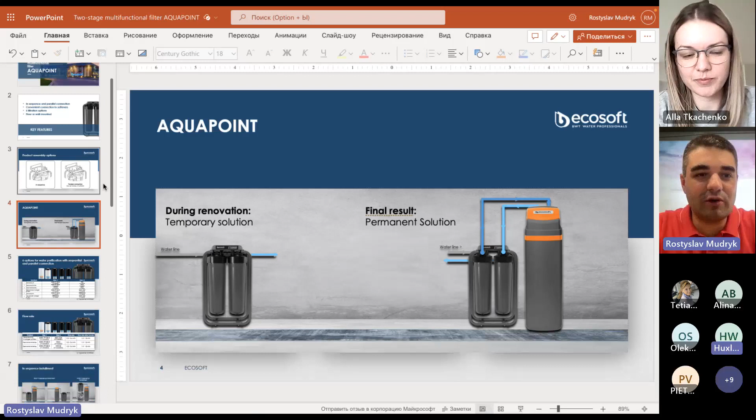As usual, I will share my screen and show a few pictures to start. So today we will talk about the AquaPoint filter. Let me share the screen. So now you should see the screen. The AquaPoint filter is what we call a two-stage multifunctional filter, and by two-stage basically we mean...

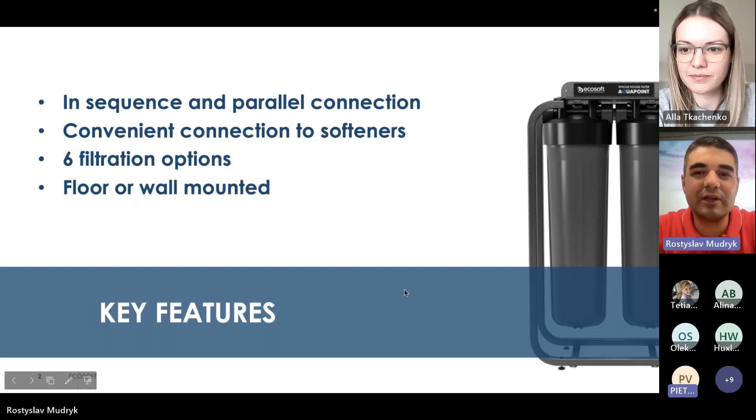By two-stage, I would like to ask... to mute the microphone, it's the same thing as before. Peter, can we ask you to mute the microphone? Otherwise we will talk in French. Yeah, it's muted now.

By two-stage, we mean that it has two big blue housings mounted on a frame, and these big blue housings can be connected in various configurations, which is what we'll explain today. It's also a very convenient solution to be connected to softeners, and it has at least six filtration options, depending on the water quality and the filtration system you're designing. It's designed to be conveniently mounted on the wall or on the floor.

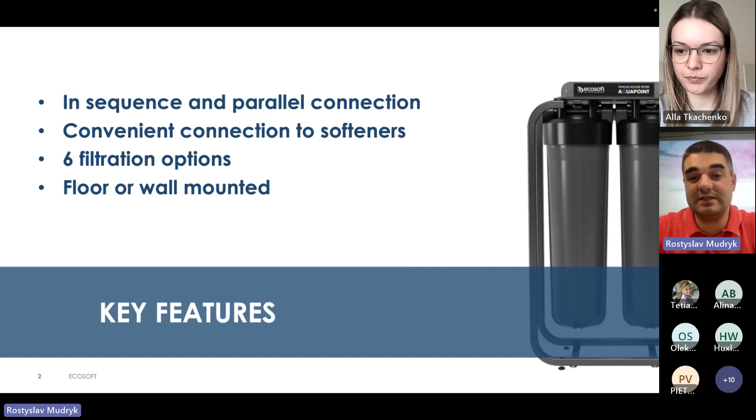This looks like a very simple thing at first look, but if we look at the materials now used to build a house, sometimes it's wood, carton, or plasterboard, where you cannot easily mount a filtration system. So the AquaPoint is designed with the thought of making the life of technicians and engineers easier. That's the general idea.

When I say it has various connection options, I mean the filter is delivered disassembled—I'd say it's Lego style or IKEA style. You open the box, which we will do at the end of our talk, and you connect the housings in the way that's convenient for you. So this is a very flexible product.

We call this way of connection 'in sequence,' when you have one filter just after another, made in sequence. Or you can make a parallel connection, which can be used for different applications too—we'll talk about that later. Today we will use these two terms, in sequence and in parallel, to describe these two ways of connection.

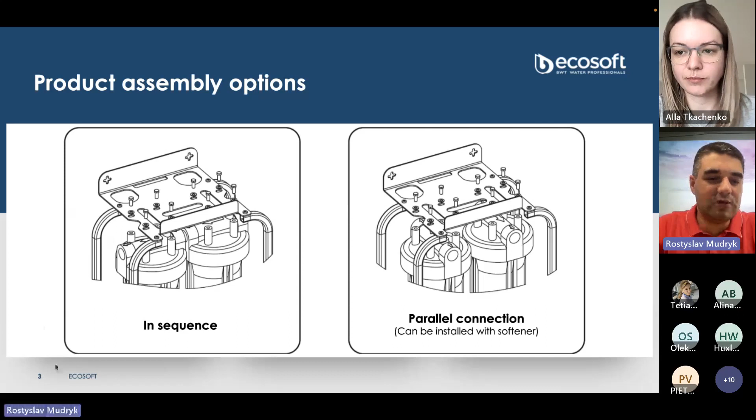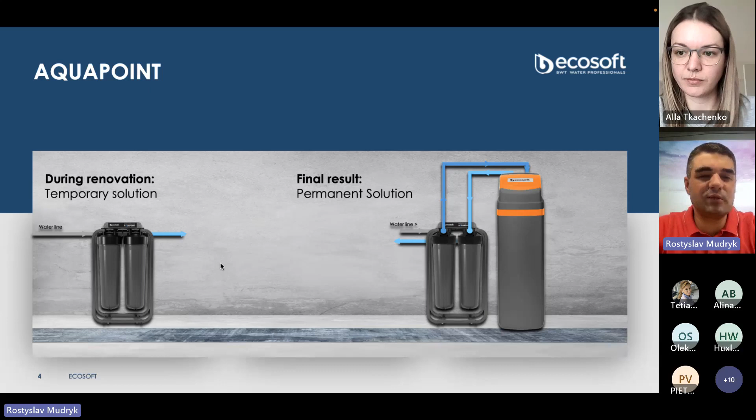And of course, we will talk on the type of connections when it is used separately and when it is used in combination with various products. And at this point, I would like to jump to the questions from Alla, and we will be back to the presentation while we discuss the questions.

I think it would be much more convenient for everyone. Thank you, Rusty, for the prompt introduction. So to start with, I would like to ask you, what was exactly the idea of the AquaPoint product?

I believe everyone knows what the big blue housing filter is for. So normally almost all filtration units, filtration systems, start with the big blue housing as a sediment filter.

And when we looked at modern houses, like in the room we are now, I will show it. For example, in this room we have a wall. This is a modern material, a kind of carton, or it could be called plasterboard, or it can be wood. And when you try to mount a bracket of big blue housings, first of all, it's quite a complicated job.

So first you have to go to a DIY store and get special tools to do it. And when you're done, you say, I finished. But you would have some surprises after 6 months or a year. After several replacements of cartridges, when you switch and try to change the cartridges, and tighten the housing, you discover that the bracket is already outside the wall, so it is detached.

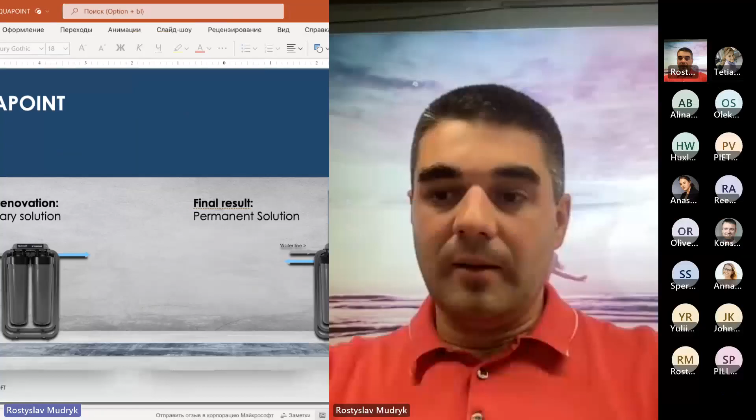So this was basically made for well water, but what we also see now is that many companies use AquaPoint for tap water too. For example, in restaurants or cafes when we install robust units, many companies put AquaPoint just before the robust, and then they do all the filtration in the kitchen or in the bar. So you can go both ways, well water and also tap water.

Okay, clear. So if a customer decides to buy an AquaPoint, like in addition to a robust or softener, does he also need some tests for water analysis for AquaPoint as well? Do I need it, and what kind of test?

Well, basically when we install a filtration system to well water, everyone requires a water test. This is the rule, because you never know what the water quality is in the well. Even if you install a simple filter like AquaPoint, you have to do a water test, because when an end customer contacts us, or which normally does not happen, normally the end customer contacts our dealer and asks for water filtration. So they contact us as water experts, and to provide a solution we have to know what we have to solve. This is important. So the water test shows the dealer, shows us, what are the problems to be solved, what are the contaminants to be removed.

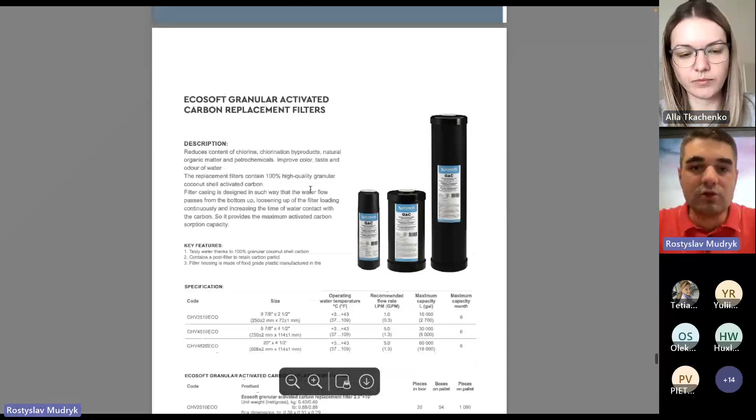Before answering this question, I would like to jump to our catalog, which is available on our website. We are working a lot on our website, so I always try to show it because it has a lot of innovations, something new every week. The catalog is right here on the very first page, so you may download it.

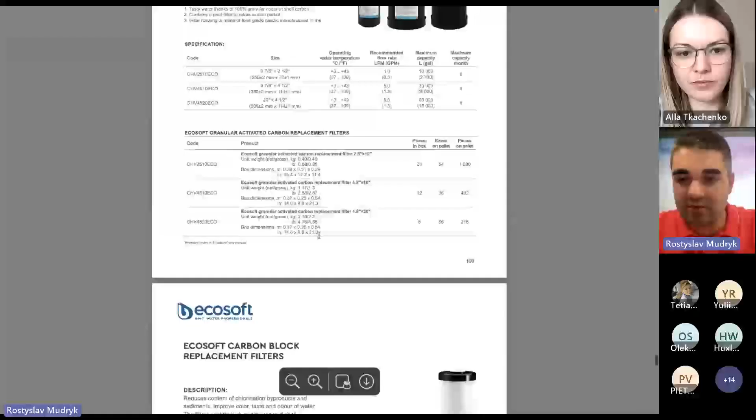When you open it on page 109, with the replacement filters, you would find all the filters I have just shown, right here.

Thank you. And to answer your question, how often to replace: there is the capacity. For example, the big blue GAC has a capacity of 80 cubes of water before removal efficiency drops, this is the capacity on chlorine removal. So we recommend replacing the cartridges based on time, and we suggest changing them at least twice a year.

Because all the cartridges I have shown are not washable, so there is no regeneration. They just consume the contaminants, and it's nice to replace them every 6 months at least to keep them fresh and to keep the water quality high. So this is important.

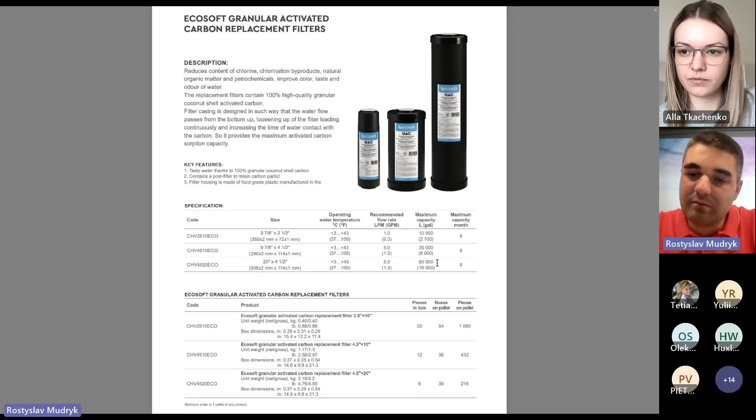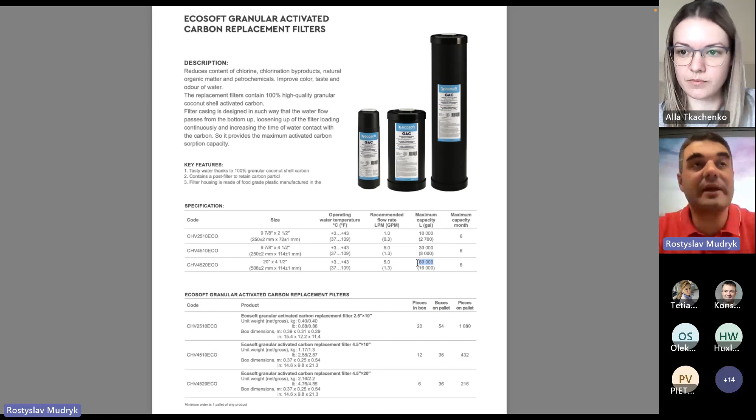Or you replace them by volume. So you have to follow the volume. If it's exceeded, it's better to change it even more often. Sometimes you have to replace them more often. As a general rule, from experience, normally these kinds of cartridges are replaced within the range of 3 to 6 months. So this is a reasonable replacement frequency for these cartridges.

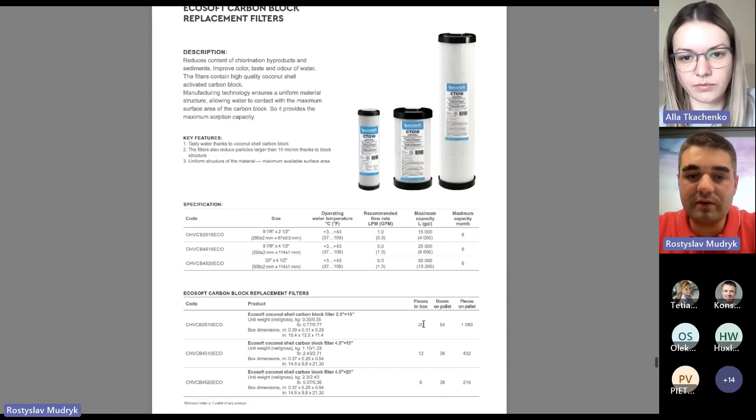So we have the capacity for the GAC, and then we have the capacity for the CTO. We have the values here. These are the small ones - this is not from this presentation. The Ferromix has quite a small capacity because iron is quite a hard contaminant to be removed.

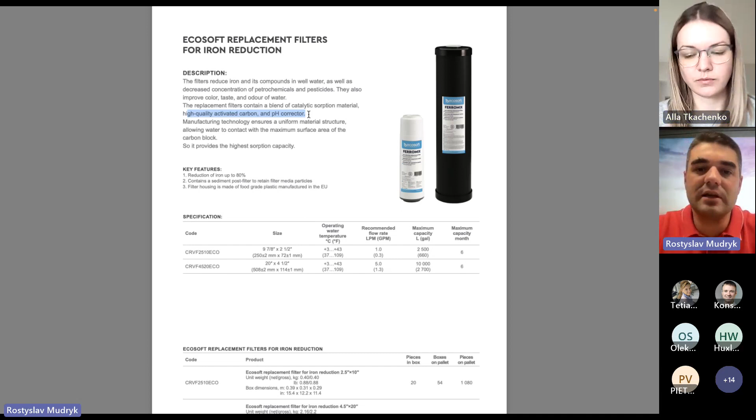But it's also important to mention that inside, this is not just iron removal media. Inside we have a combination of iron removal and pH adjustment to make the iron removal effective. So this is a very nice and, I would say, tested combination of medias, and we have been producing this cartridge for more than 5 years. This is also one of the best sellers in our product range.

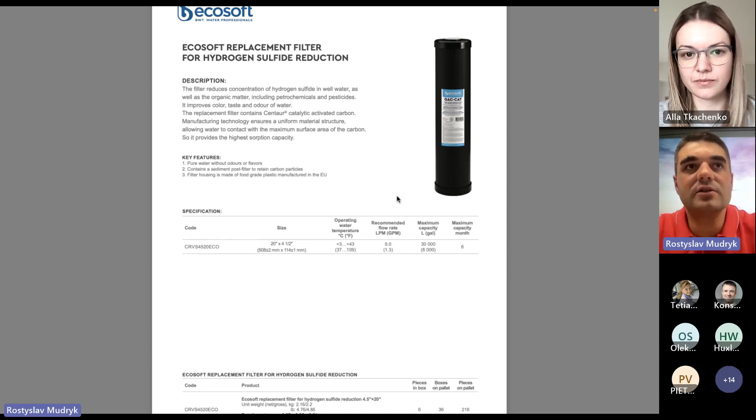But the best seller, the leader, is this one, the GAC CAT, catalytical granular activated carbon, to reduce H2S. So the best application is to sell it with Ecomix softeners just as a final filtration stage.

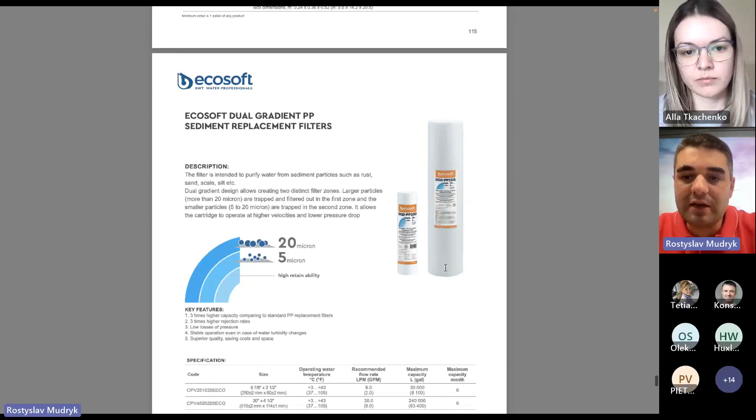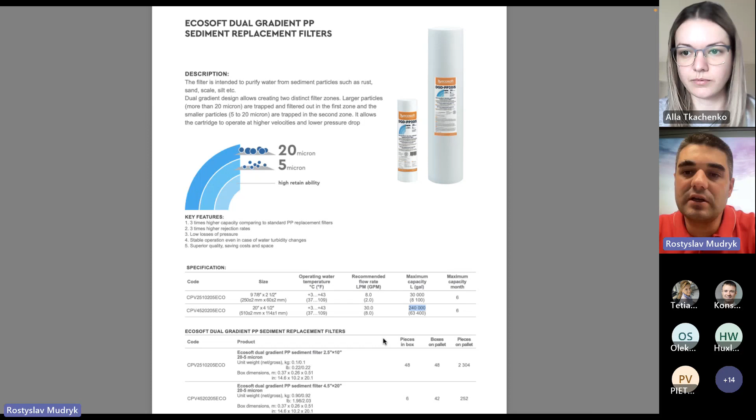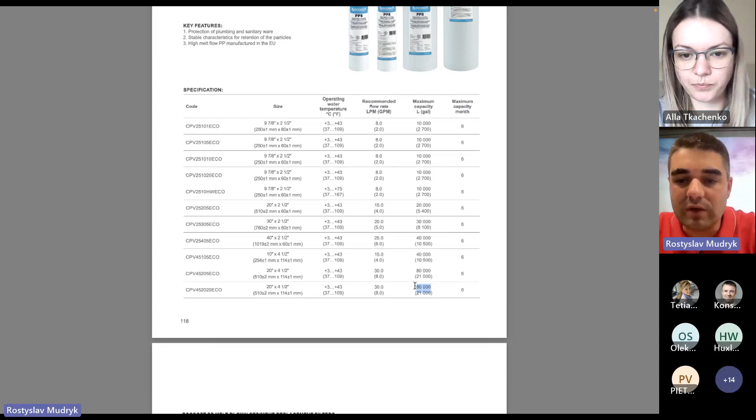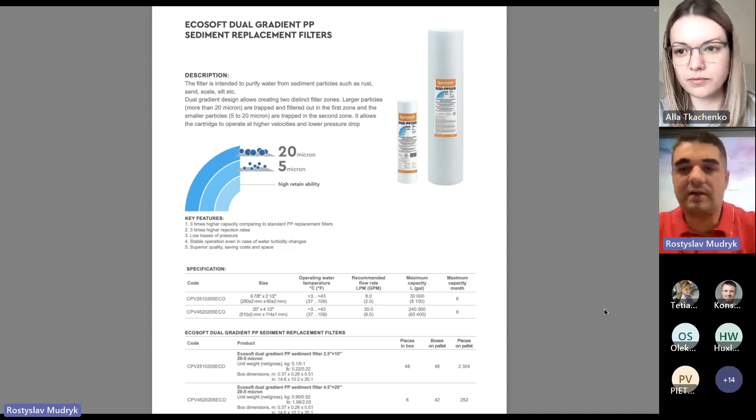And we have the string wound, but I would like to draw attention to this one: the dual gradient cartridge has a very high capacity, 240 cubes of water treated. So it is more expensive than a regular polypropylene cartridge, but we can compare the capacity - this one has 240 cubes, and this one is 80. This is a very big difference, and it's really worth buying this one because it's more cost effective. So this is the overview of the cartridges and the variety you may select.

So that was the idea why AquaPoint is sold without cartridges - it gives lots of ways and opportunities to satisfy customers and end users with quality. Exactly, because when we try to do combinations, there's an endless amount of combinations of AquaPoint and cartridges, and finally we settled on the empty AquaPoint because this is the best. We had old products that are out of production already.

So to continue, I would like to ask you about the working pressure for the AquaPoint - what limits are there, and also from Scandinavian countries I've received requests about high pressure water. So if the water pressure is out of the limits, what happens and how do we proceed? Yeah, the pressure limits, the pressure range, is standard, from 2 to 6 bar - this is the operating pressure.

This is from 2 to 6 bar, the operating pressure. When you have more than 6 bar, we suggest installing a pressure reducer, just to make the whole water treatment work properly. A pressure reducer works for each pressure, even for the highest, like 8 or 9 bars.

Normally there are 2 types of pressure reducers - there's a regular one. For the regular ones, the maximum pressure is 15 bar. So if you are below 15 bar, you just adjust the pressure. And also there are pressure reducers with a maximum of 25 bar, so this is no problem.

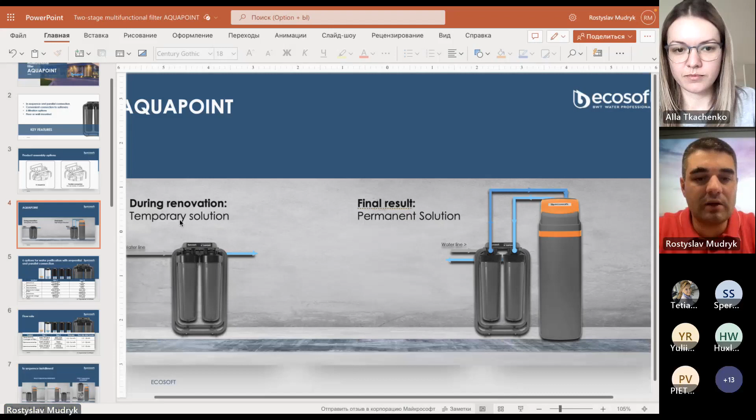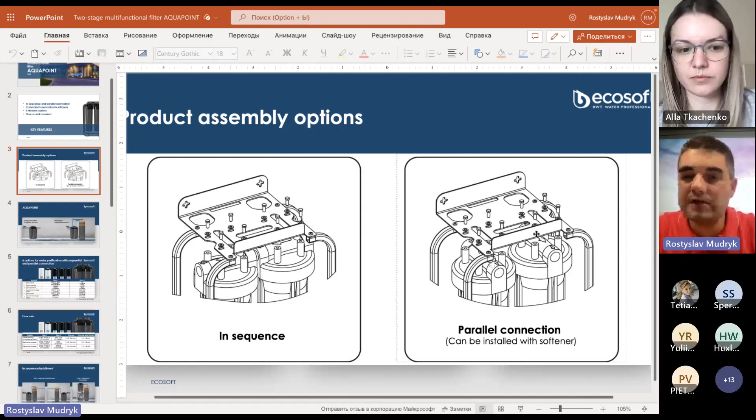Yes, this was one of the main ideas why we decided to make this product. I will jump to the presentation. When you do the construction, you install the AquaPoint, and if you know that in the future you will have a softener, you may already install it in parallel connection and leave it until you buy the softener.

As soon as you buy a softener, you will invite your dealer. One clarification - if we install it in sequence, can the softener be added additionally? No, it can also be installed, but in this case you will have to unscrew the screws.

Then you remake a little bit of the piping. It is also possible, I would say it is medium level complication. But if you know in advance that you will buy a softener later, mainly you know this from a dealer, from the water expert.

He will tell you, you will require an Ecomix unit because you have a lot of iron, and we will bring it to you afterwards. But when we install the AquaPoint, he will install it already in this way. So we will show it at the end of our Friday talk.

We have the AquaPoint here, so I will show how to make it. He will mount the housings like this, and after, say, 6 months or 3 months, depending on when you buy an Ecomix unit, he will just disconnect this pipe and connect the softener with flexible hoses.

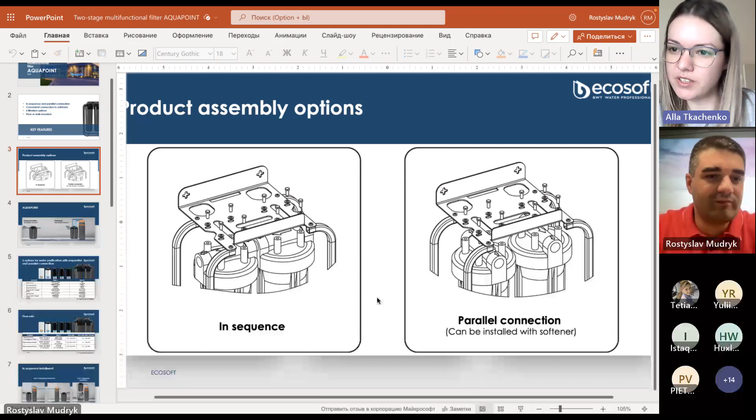Just in case, can you add how we can use AquaPoint for commercial reverse osmosis systems? I will go down with this presentation and open it like this. So let's start from your question, from the commercial RO systems.

The answer to your question is yes. We recommend using AquaPoint as a pre-filtration and also as a post-filtration for the commercial RO. Let's look at this closer. When you have tap water before the commercial RO, you may install AquaPoint before the RO in sequence with the dual gradient cartridge and also with the CTO.

So if you have these products - the RO 5000, 6000, 6500, 10,000 and 12,000, basically with one or two 4040 membrane elements - you can select these two cartridges. The dual gradient would reduce sediments and turbidity, this one would reduce chlorine, and this would be a very good pre-filtration for the tap water before RO when you have good quality tap water before RO.

Also, you may use AquaPoint as a post-filtration. We also supply calcite cartridges to increase the pH, because normally the pH of water after commercial RO can be a little less than 6, from 5 to 6 units. When you want to increase the pH, you may go for the calcite cartridge and CTO cartridge installed also in sequence in AquaPoint. This is what is recommended. Also, I would like to extend a little bit your question.

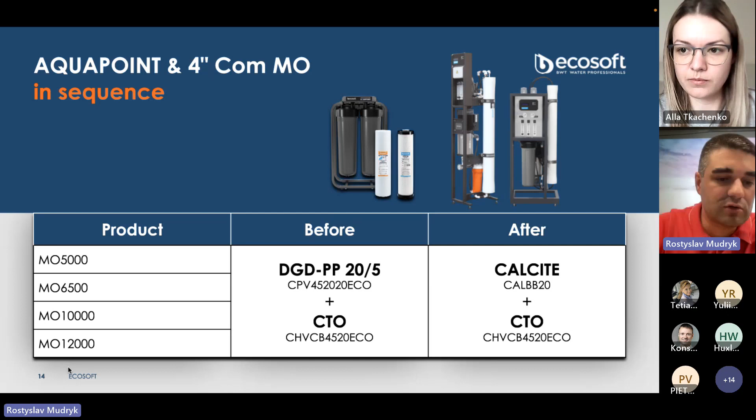So we have the new models: the MO 20,000 and the MO 30,000, which are two commercial ROs. They are built without a sediment filter, so in this case, a dealer has to install a sediment filter before these units.

In this case, you may go for a dual gradient cartridge and polypropylene cartridge in sequence with AquaPoint. Every time a dealer sells one of these two units, AquaPoint is highly recommended as prefiltration. You can also use it as post-filtration for pH correction and smell and odor correction of water if you have a tank, for example. So the CTO is also very useful after RO.

Let me add something to this question, then we will answer the guest's question. AquaPoint can be used either as pre-filtration or post-filtration, or both. You can also supply two AquaPoint units: one as pre-filtration giving two-stage pre-filtration, and another as post-filtration, also two-stage.

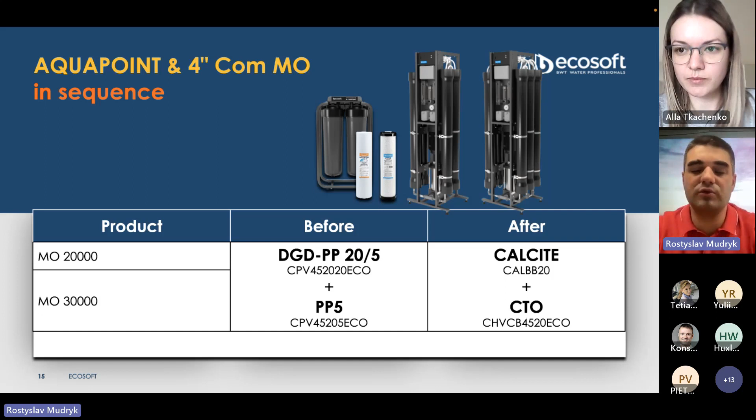So you choose the correct cartridges, and then the water will be perfect quality, correct, right? Yeah, after that. So we have a question from a guest.

The frame is made of steel, with powder coated painting. This is the frame, this is a part of the frame which we will assemble in a few moments. It's high quality powder painting. Okay, let's proceed to packaging.

Let me ask you, how do we receive AquaPoint exactly? Is it delivered disassembled, and why? I'll take a few seconds pause, jump to a second camera, and we will show how it is delivered.

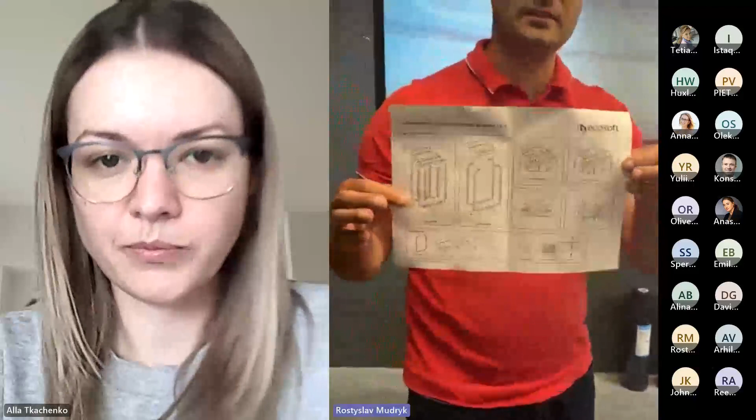We have the screws for the housings, then the screws to assemble it, we will arrange them. Then we have the connection union, and the Teflon tape. Of course, we have the big housings, these ones in gray color. I will keep them here because we will need them a little later. And of course, there is a manual, in Lego style. So everyone who liked to build something out of Lego bricks in childhood, this is a similar story.

So I will assemble it, and we can actually measure the time needed for me to assemble the AquaPoint. Basically, what we need is a screwdriver, and also another screwdriver with a wrench for the big blue housings.

So basically, first we connect the bracket. Alla, you will tell me how many minutes it will take me. Okay, I have a timer on.

To assemble. So now you are doing this because we have already received some questions from our customers about why it is delivered disassembled. Yes, because before it was... Can you switch on the sound here, because I don't hear Alla.

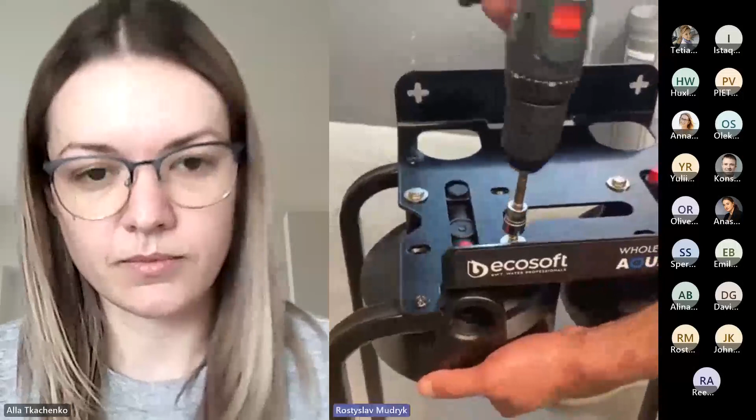So I have now. You can tell me how many minutes. Oh, it's almost 5 minutes, even less. Maybe you will require a little bit more. I would say up to 10 minutes you will need.

Also, I would like to draw attention that it has legs, with the regulation. It is important when the floor is not horizontal 100%. You may balance it on the floor, and then what you do, you just put it next to the wall.

Put next to the wall, and many of our customers don't even connect it to the wall. They just leave it as it is, and they do the piping. If you pay attention here, we have some space that is enough for the pipings to go up, to go down, and then you save a lot of space.

And then finally, if we look at it from this perspective, it looks much better in comparison to the single big blue housings that is just hanging on the wall. So it looks nice. This is what, when we talk to our dealers and ask them why do you like AquaPoint, first what they say is well, this is a sediment filter that looks nice, because normal dealers like to do nice installation. And then, of course, we have a range.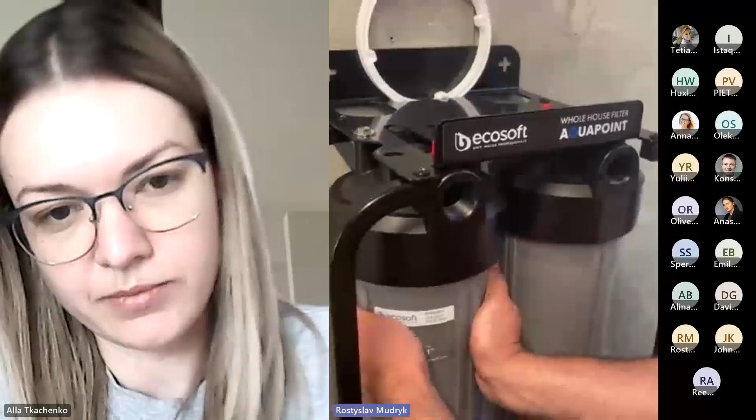Let me finish. So then we put the housings. And we have a place for the wrench, and now it is finished. If you are patient enough, you will do the labeling also in front.

So now we can start to connect AquaPoint to the water distribution system, to connect the inlet, outlet. But basically, the assembling is done. So I switch to the computer.

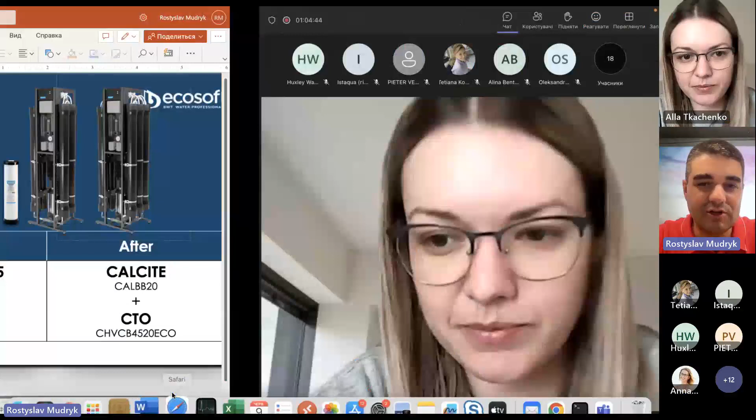There are some cases like this one, when you don't have space on the floor, you can also hang it on the wall. It has quite a thick bracket. It is designed to be hung on the wall. So this is possible, and when the wall is made of concrete or made of bricks and is strong enough, then you can go also this way.

If it's not strong enough, it can fall down, or it can damage the wall. So if the wall, like in this room, is made of carton, it is very nice, it looks nice, it is very fast in construction, but it is not Big Blue friendly, I would say. It is AquaPoint friendly. I have a question from a guest.

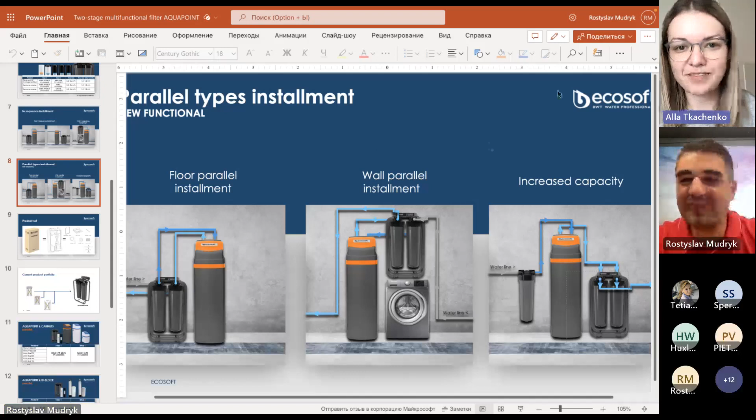No, we do not have brass inserts in our housings because we don't like brass inserts in the Big Blue housings. Very often when you screw in the connection, the brass inserts can be broken and then you have a leakage. So we prefer to buy high quality Big Blue housings with a good plastic head, and it is BSPT thread. Then whether you use plastic thread or metal thread, you can go two ways. In our experience, it is better to go without brass inserts in the Big Blue housings.

I think we have some more questions, because I see that somebody is typing. But anyway, if we have any more questions, we can. We will wait. Alla, do you have more questions, please? Yes, I will think about it after answering our guest's question. Well,